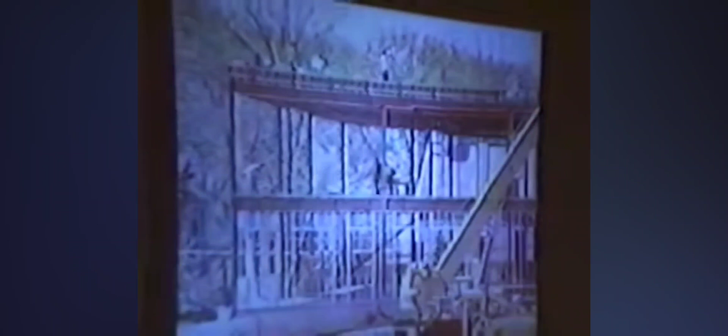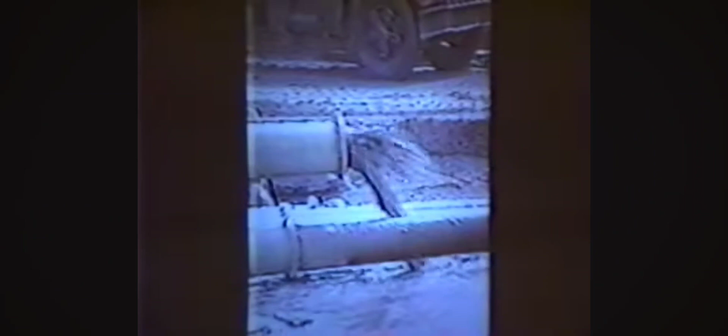In today's fast-paced and ever-changing world, if mankind is to continue to live and prosper, we as human beings must be able to accomplish 3 things. First, we must find energy-efficient solutions to our present consumption levels of fuels. Second, we must make sure these efficient energy sources do not further damage our planet. Third, we must be able to find an adequate source of clean and pure water. To combine these 3 goals has been a very difficult task, a very elusive goal for both government and private projects. Today, however, because of the efforts of those committed to energy efficiency and environmental safety, a new invention exists that can truly change the way we as a world and as individuals think about energy and our planet. A revolutionary new concept in energy has brought into being a new device called the hydrosonic pump.

Here is Jim Griggs, president of Hydrodynamics Incorporated, to tell you about this amazing device. What you're about to see is a short video on the hydrosonic pump. The operation of this invention is based on the theory of heat transfer that takes place during the production of a shock wave in a fluid. We all learned in high school science classes that energy can neither be created nor destroyed, only transferred from one medium to another. Welcome to a new era in energy efficiencies.

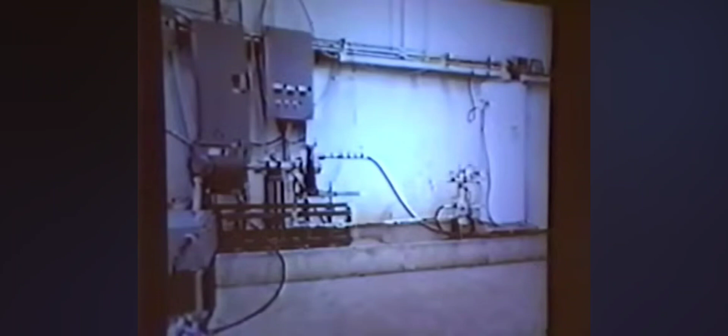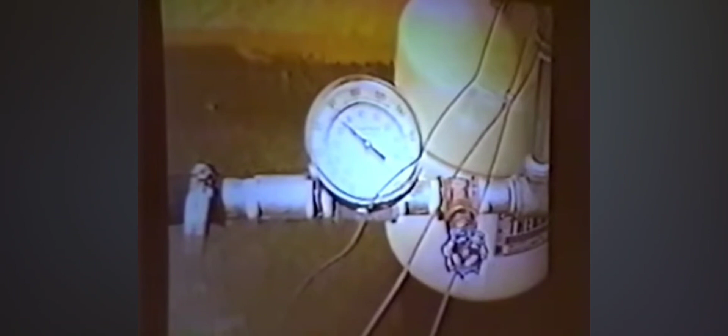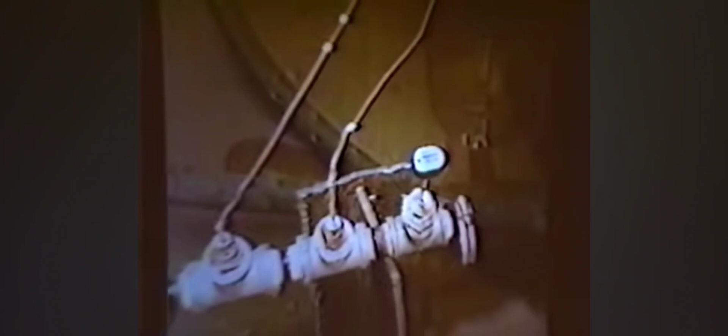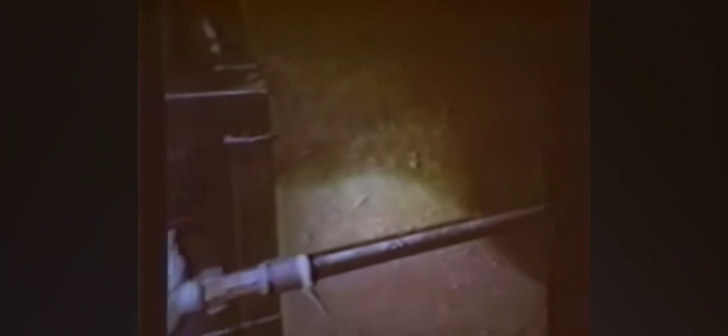What you're looking at is a test facility for testing hot water with a hydrosonic pump. The input water source is city water pressure fed into a 120-gallon reservoir tank. The water exits the bottom of the tank at approximately 75 to 80 degrees. Temperature is confirmed through J-type thermocouples, connected to a data acquisition system which will be monitoring the entire test. The water travels down the feed source line and through a turbine flow meter, into a second turbine flow meter for verification, and then directly on into the hydrosonic pump.

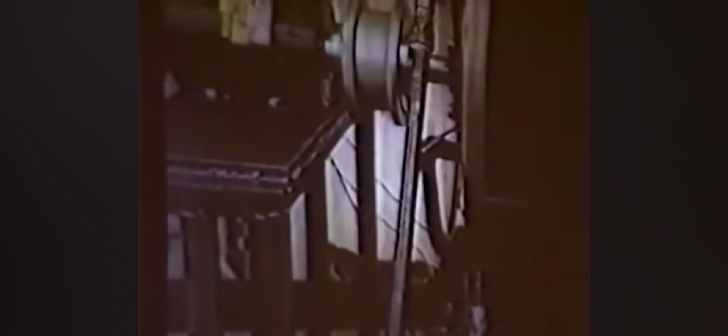The input power source is monitored by a Lebow torque meter, which you see on the left. The pump runs, the water exits out the right side of the pump, once again monitored with J-type thermocouples, and through a hose line that feeds directly to the outside where the water is running onto the ground.

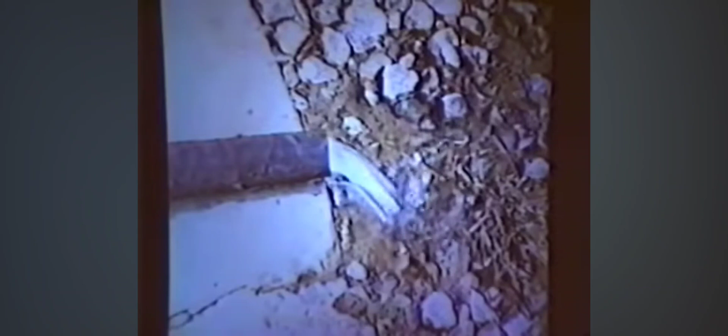When the test starts, this water line will be placed into a 55-gallon drum and a stopwatch started to take the time of the test run. During the course of the test, the data acquisition system is monitoring all the activity of the system as well

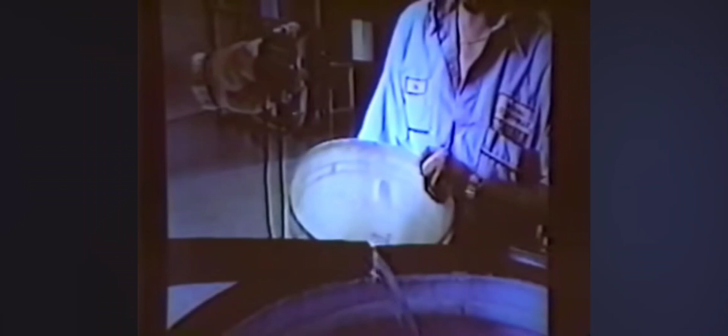as the time to compare with the stopwatch. At the end of the test, all this data is assimilated and a COP is derived to show the excess heat. The Dranetz 808 is used as a verification for input power, and when the test is completed, the hose is removed, the barrel is then weighed for verification of the test.

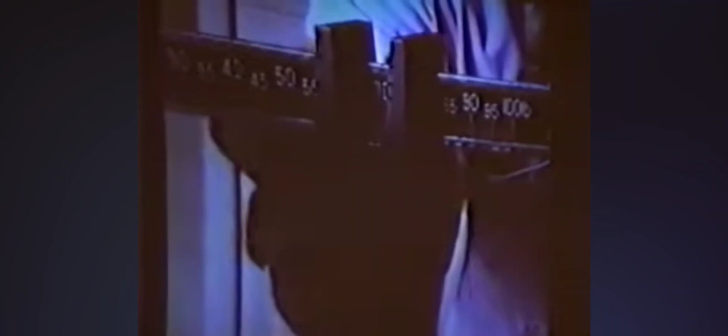All of this data is available to you here at the conference.

The setup for steam testing is a little different. We take and feed into the pump by a standard condensate return feed system as it would be for a

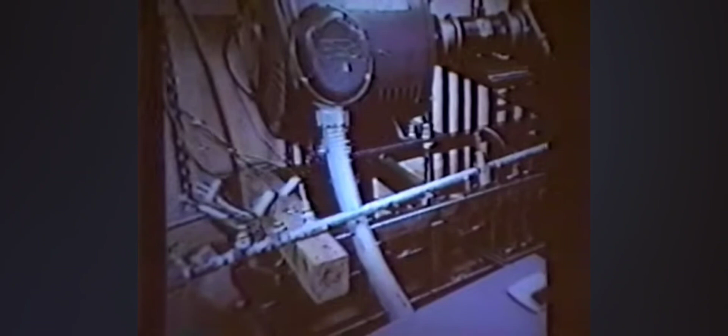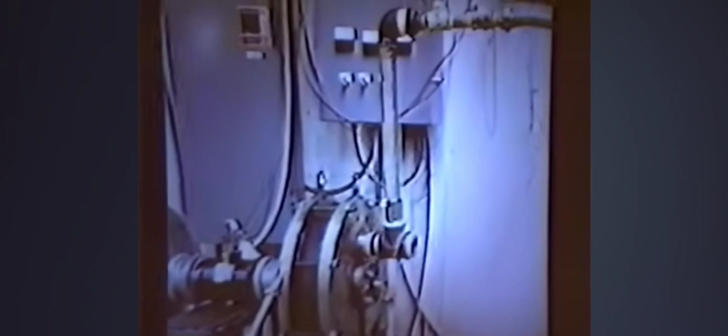standard boiler, either gas or electric conventional system. Once again, coming into the feed line to the pump, we monitor the temperature of the water with J-type thermocouples, monitor the input power with a Lebow torque meter, and feed the water directly through the pump, this time producing

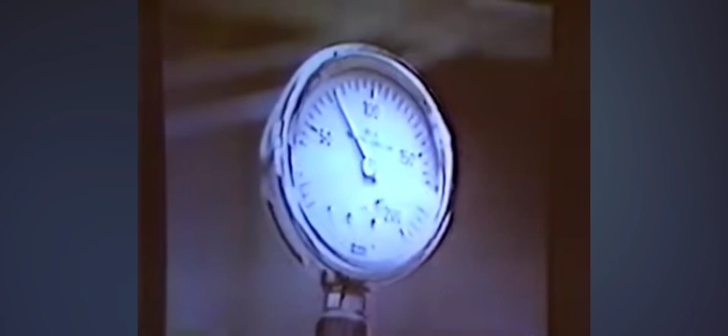steam instead of hot water, measuring the outlet temperature with thermocouples on the outlet side, feeding across a regulator valve that regulates the pressure or the temperature of the steam into a flash or separation tank, and then directly to the atmosphere. As you can see, we're operating this test at approximately 70 pounds of steam pressure and exhausting the

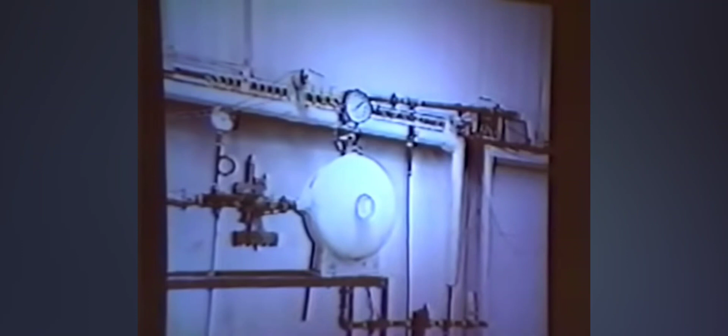steam to atmospheric conditions. Once again, the data has been collected and is being assimilated into the computer, which in turn will provide us with specific data sheets which are recorded once every minute, and these data sheets are available here at the conference. As you can see, the system puts out quite a bit of steam with a sized unit in comparison with a standard boiler.

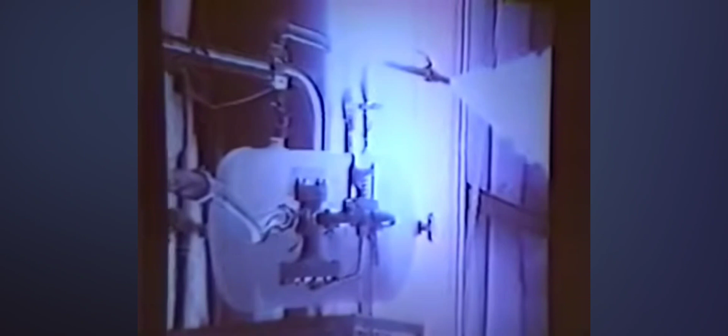What you're seeing here is a commercial hot water system for both process and domestic use water. This system heats water at approximately 45 degree delta T at a flow rate of around 5.5 gallons a minute.

Inside the luminescence, you see blue bubbles in the water. We see blue steam coming from our pump. The excess heat is only one of the anomalies of this system.

At the beginning of this video, we talked about the 3 things we must do to make our world environmentally safe and energy efficient. We have just introduced you to a device that can meet those requirements, the hydrosonic pump.

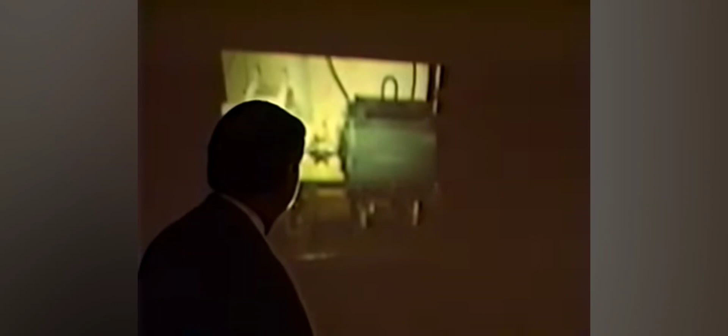Is that going to be reasonably big enough? That's the very last picture. Okay, there we go. Yeah, I think that'll be... can y'all see that? Okay, that's big enough.

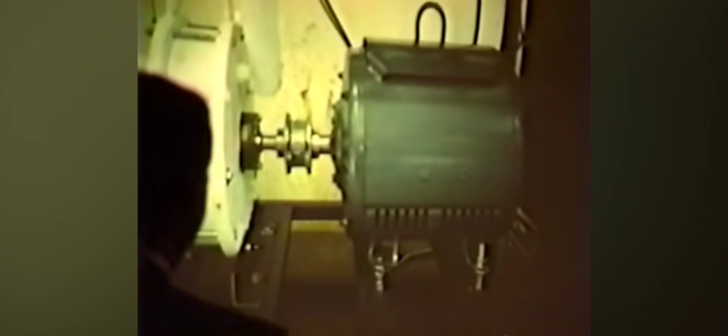This is just the configuration. We have an electric motor through a coupling driving the pump. Go ahead, next slide. The reason I show that particular pump is because I brought the rotor out of it. Something happened when we changed the design, and I'm going to discuss that with you.

Is that focused for y'all? I can't see it without my glasses anyway.

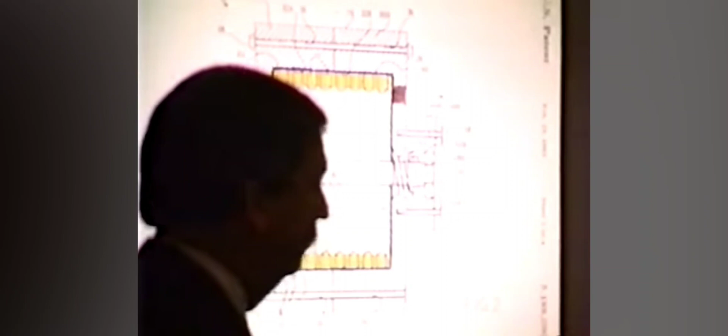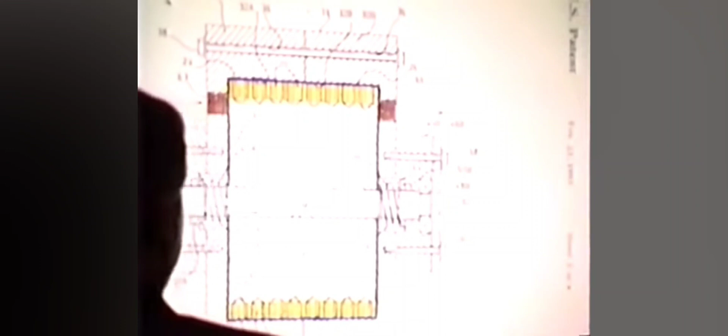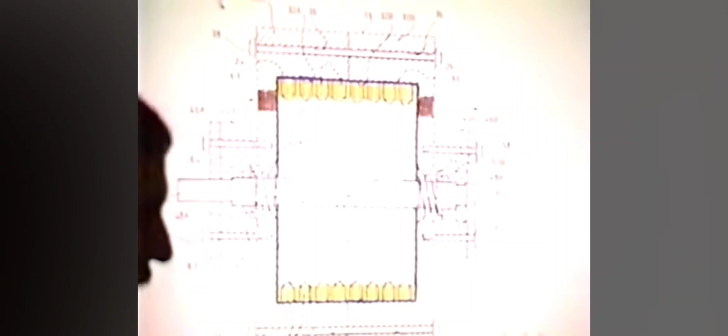This is basically the design of the pump. You have an aluminum rotor, which is solid aluminum, connected to a stainless steel shaft that's run through two mechanical seals and then externally to two bearings, and then it spins inside an enclosed housing, and the blue around it shows the very close tolerances. Depending on whether we're making steam or hot water, these tolerances generally range from 125 thousandths on the low side to about 250 thousandths on the high side. The housing and end plate material of the pump is made out of 1020 carbon steel, and the rotor itself is made of 6061 alloy aluminum. The shaft is 304 stainless steel, and the springs to all the seals are 304 stainless steel.

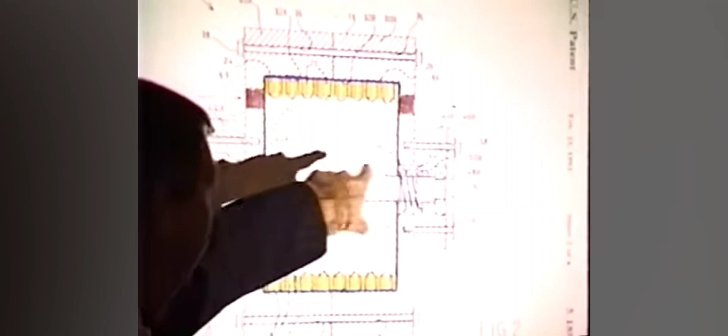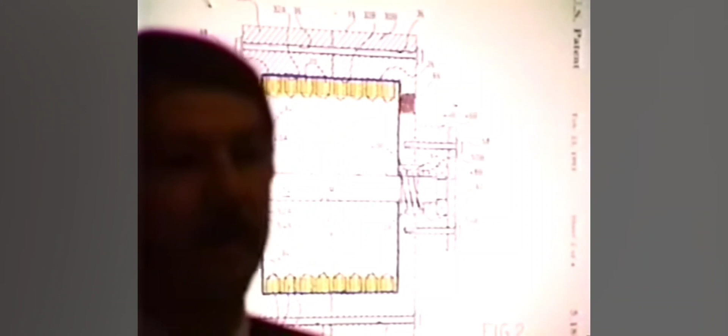The water is put into the pump here, circulates, and depending on the water flow, it comes out here as either hot water or steam instantaneously. In the steam test, you regulate the water flow so as it goes in, it comes out as steam. To change it from steam to hot water, you either change the rotor design or increase the water flow to the point that it can't all flash off into steam. That's the basic design of the pump.

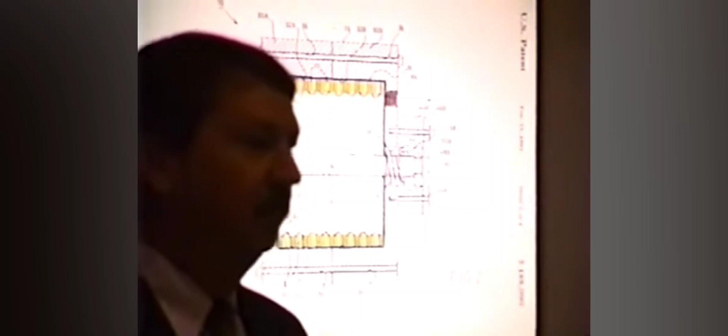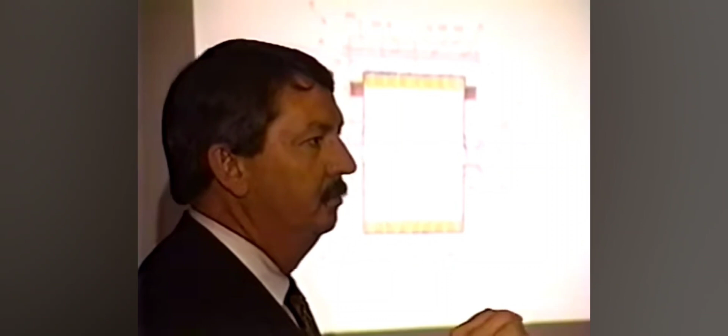As I told you at the very beginning, my concept behind this was to try to create shock waves of very short duration, and I initially thought that's where the temperature transfer into the fluid was coming from. Because if you go back and study shock waves a little bit, you find out, especially in water flow, whether it's laminar flow or the dynamic viscosity of it, that there is some tension or friction there, and I thought that's where the heat was coming from.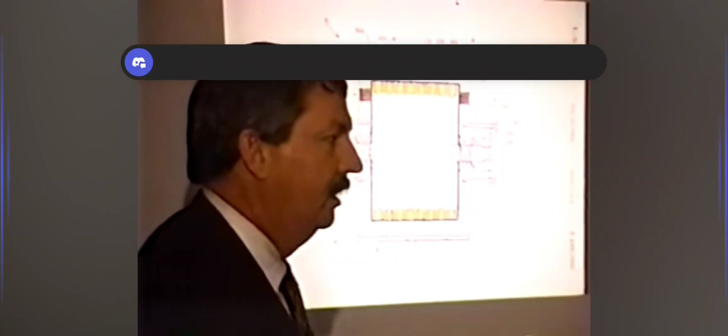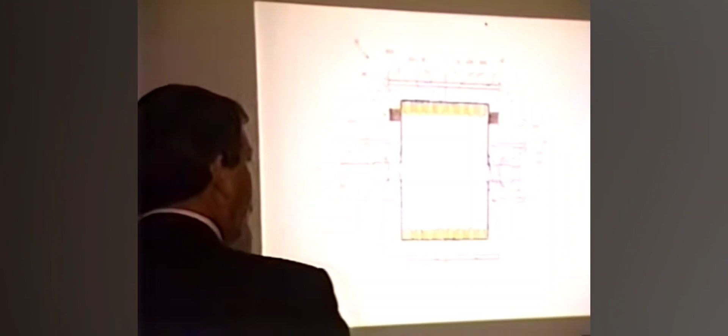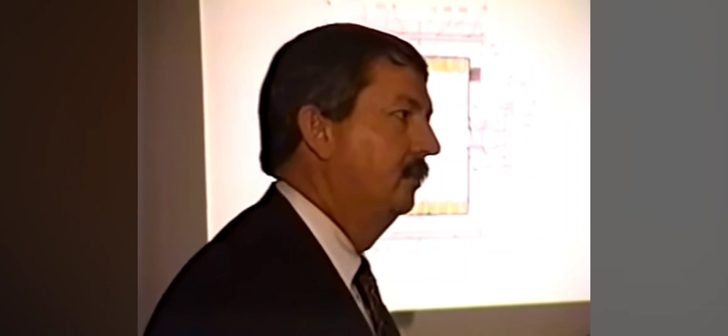After learning a lot about the cold fusion industry and specifically sonoluminescence, I found out that there's a tremendous amount of heat created when you collapse tiny bubbles. One of the things we always saw when we ran the pump is that the water coming out became aerated, had a lot of bubbles in it, regardless of what you did. So I was studying all the sonoluminescence information I could get a hold of.

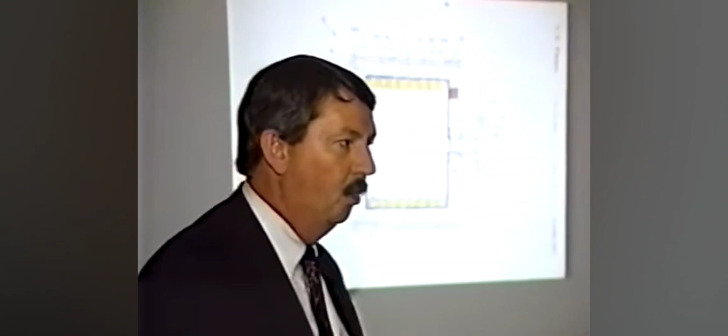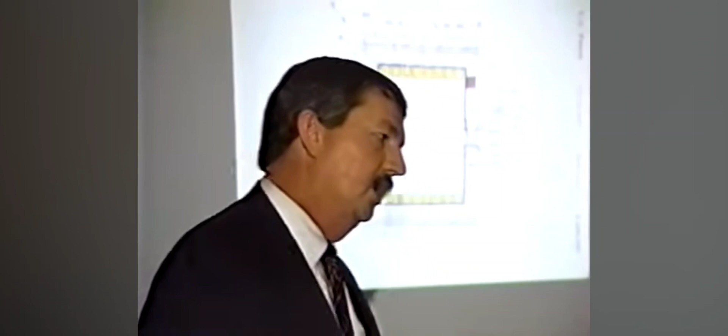I found out that they were putting a sound horn on a beaker or whatever they were doing and injecting a sound wave through that water. And I asked Peter last year, could you possibly induce a harmonic resonance mechanically, simply by vibrating the water, sufficient to cause bubbles to form and collapse or oscillate? He said he thought that you could, and we went back and based our research this past year along those lines.

I've got to apologize, I had a presentation prepared and it's laying on my desk in Rome.

Going back and looking at some of the studies done on sonoluminescence, specifically from the University of Illinois, and Putterman and Barber from UCLA, they concluded that the radiation pressure of a resonant sound field in a liquid can trap a gas bubble. At a sufficiently high sound intensity, the pulsation of the bubbles is large enough to prevent its contents from dissolving into the liquid. And for an air bubble in water, a further increase in intensity causes pulsations to become so enormous and nonlinear that supersonic inward collapse of the bubble concentrates the acoustic wave over 12 orders of magnitude.

Well, that led us to believe that if that was happening on the rotor surface itself, we should start to see some kind of cavitational damage. We wanted to check this because our rotors were made of solid aluminum with surfaces machined to a perfectly smooth finish all the way around. We've got pumps that have been running for 4 and 5 years that have no cavitational damage at all.

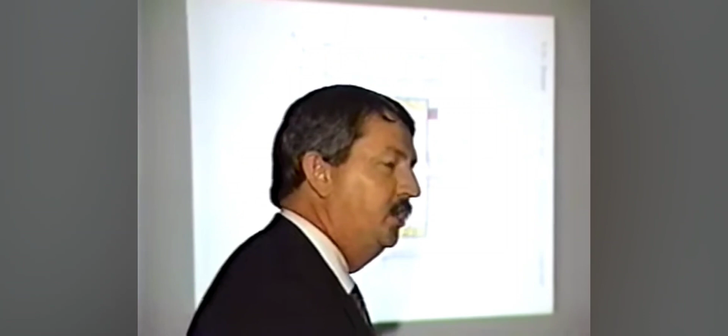As a matter of fact, one of our sales points is that this machine is self-cleaning. Unlike a boiler, you get no scale buildup around our pump or around the housing on the inside because of the acoustics that are going on.

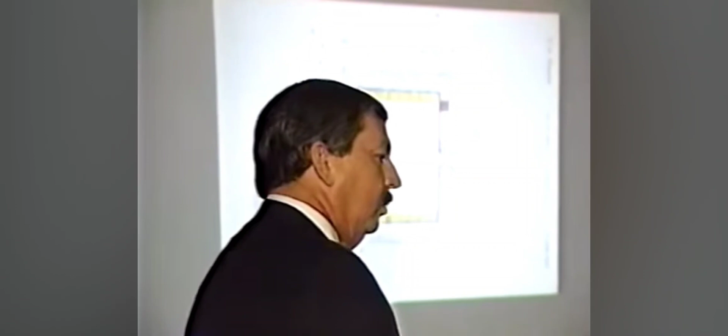We were extremely happy about that, but we said if these bubbles are collapsing, we've got to find out and know. So we searched around and finally found a piece of glass to replace this housing with. We spent $1,800 for a piece of glass and the machine work to get this pump ready. The glass was a piece of special made glass that somebody used on the space shuttle, made to withstand 450 degree temperatures and 125 pounds of pressure.

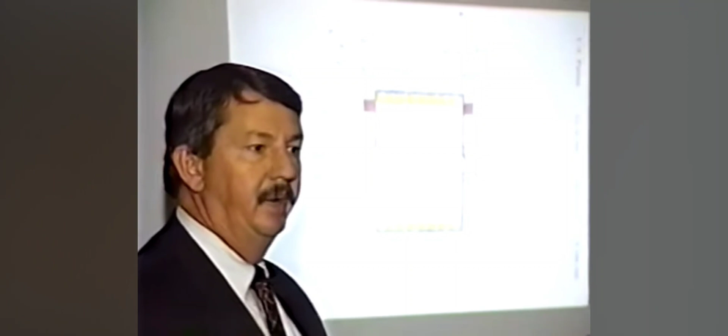So we said we'll just operate at low steam pressure. We put the glass housing on, cranked the pump up, and within 3 seconds it blew a hole out in the glass about the size of a 50-cent piece — an isolated hole, just like you'd cut it in the glass.

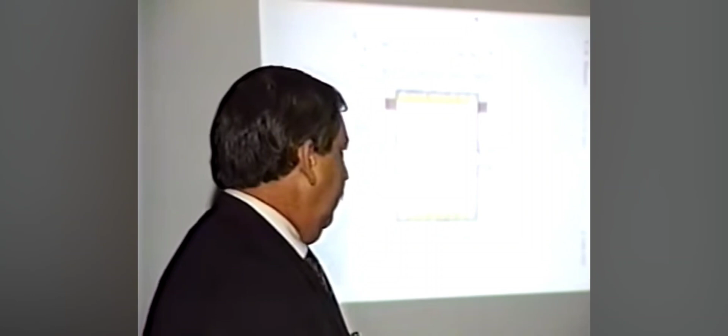That got us a little bit concerned about what was happening, and right about that time we met a gentleman named Dr. Sam Martin from Georgia Tech. Dr. Martin happens to be a water hammer cavitation expert and has numerous papers on the subject.

I went down and talked with Dr. Martin, and he got real fascinated in the idea that we had used the effect of cavitation to create heat and that we weren't getting any damage.

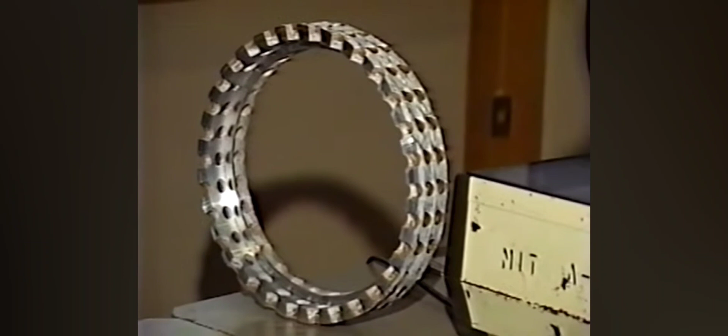We got thinking about this sonoluminescent effect. There was a lot of work done on the radius size of the bubbles, and if you could create the proper radius size, you could get maximum heat transfer. So we changed the design of that particular pump. In our best test with that particular pump, we'd gotten about 140% energy out versus energy in.

So when we changed the design of it, we hooked the pump up — can you change the slide? This goes back to one of the things that led us to believe it. In many cases, our steam comes out with a blue tint to it.

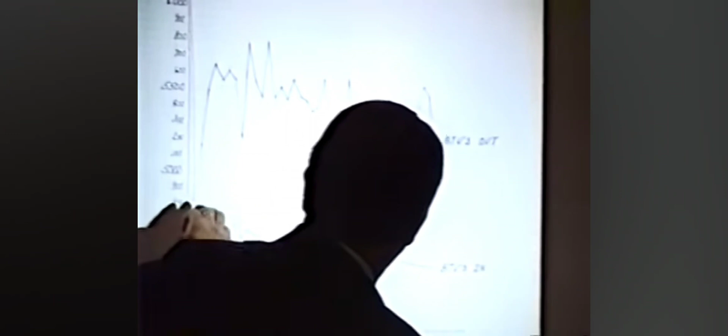This was an old graph showing BTUs out at start, BTUs in, and then the leveled off state. As you can see, there's some fluctuation there, and that's because the flow rate in the pump seems to fluctuate a little bit when you're just running standard pressure.

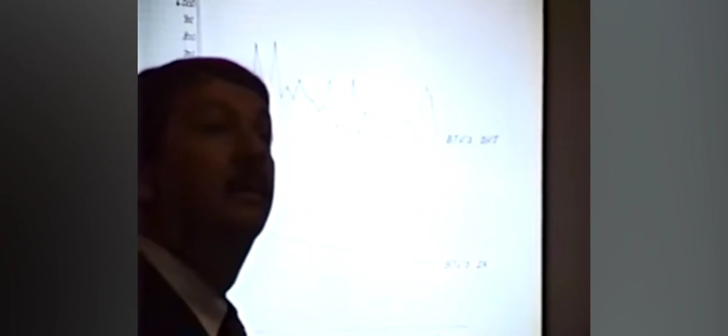I can't answer that yet.

I'm not trying to be a smart aleck when I say this, but I'll do any kind of testing you want to do if you'll pay for it. Okay.

I'll get to that. Next slide, please. Okay, this is the rotor that I have with me here. As you can see, it may be kind of hard to see, but no longer is the surface of this rotor smooth. It has been eaten away.

We had done a brief energy check of this pump, and it seemed the energy output had gone up by about 10% over our previous test. But this pump has only been run for less than 3 weeks. What I had my machinist do was put it back in the lathe and just cut it out, cutting a cross section of it.

We have sent the material of this pump off for spectral analysis to see what happened to it. But as you can see in places, and you're welcome to look at this, there are places on this pump where there are grooves cut in the side of it that are very symmetrical as far as the way it works, almost like a wave was carrying around it.

We took and put it under a microscope and looked at it, and after looking at it under a microscope, came to a very unique conclusion that this is not standard cavitational damage to this pump, and that was confirmed by Scott Williams and Dr. Martin at Georgia Tech. What has happened is that the surface of this pump has gotten so hot that it actually melted the aluminum. In other places on the surface of it, you can see little mounds that are built up.

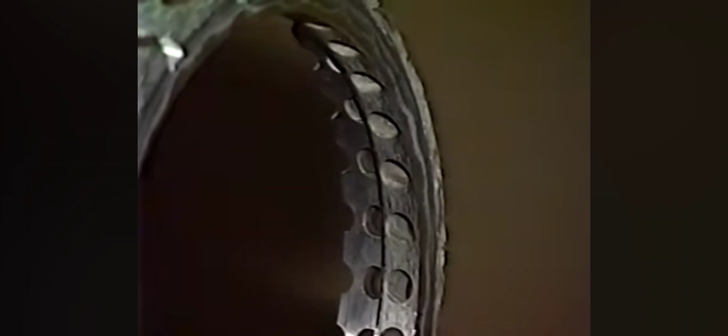There's one other phenomenon that occurred, and we still don't have the answer to it. If you were looking at this rotor, it normally would be a solid piece of metal, brightly polished, and sometimes you can see the white scale build up here. You will get a little bit of whitening to the metal at times. We had the sister rotor to this one running in an application in a dry cleaner, and they needed more steam, and we happened to go take that one out and put a new one in to increase their production.

John Nix up here, who's also an engineer, came to my plant one day, just wanted to come visit, and I said, sure, come on up. And he picked up the rotor and he got to looking at it, and he noticed something on the outside of it that I guess I'm around every day and had never noticed. On the outside, the wall thickness between the hole and the side of the rotor is 3/8 of an inch. But on the outside of the hole, there was a visible pattern of the exact design of the hole, and it was almost as if you had drawn it on the outside with a black magic marker.

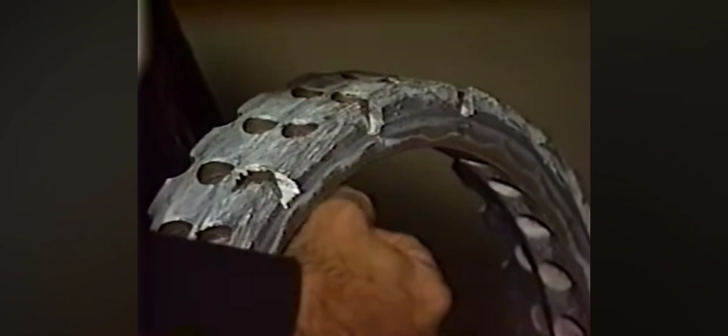We couldn't figure out how you could get the design of that hole through 3/8 inches of aluminum, and we still don't know. John suggested that we put film on it and see if we got any exposure on the film. We eventually sent it off recently to have it analyzed to see what caused it. But one of the things we did do, we went back and started measuring the diameter of the hole because we knew what the hole diameter was before we started. And after these rotors had been run for a while, we've noticed that the diameter of the hole, even though they haven't got degradation and deformed to the extent of erosion, had expanded by as much as 50 and 60 thousandths.

That means that the pressure inside that hole had to exceed thousands of pounds of pressure. And that was one of the things that Dr. Martin put to us, that when we blew the hole out in the piece of glass, the collapse of the bubble at the impingement point might be as much as 5,000 pounds. So that was just something else that was anomalous about what we were doing that we didn't understand. And you should not be able to create those kinds of pressures simply when you're putting in 150 pounds of input water pressure on this particular pump. But those are just a few of the things that we've learned.

We've been asked to do many, many experiments, and we've tried to do some of them that related back to cold fusion. Gene mentioned Dennis Cravens. I met Dennis last year in Maui, and he just had faxed Jed a thing and asked us to put potassium carbonate in it. We haven't got around to that. Since we've started selling, we haven't got around to doing any testing. I've run one set of tests yesterday just to confirm, to make sure that, like magic, this effect had not gone away before I come up here. It had not.